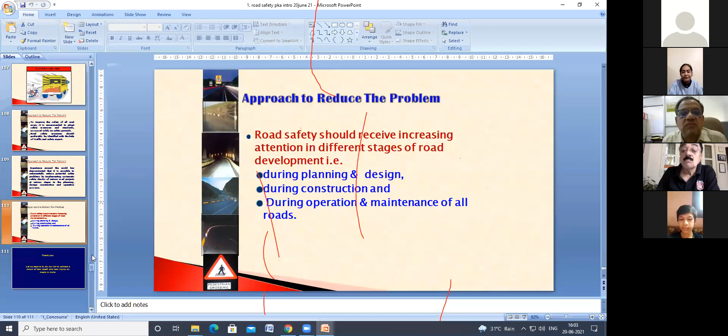So, am I audible? Yes, sir, you are clearly audible. Okay, and then the presentation is also visible? Yes, sir. Okay, so I am happy to note about the IRSC activities, and I am thankful for providing me this opportunity to interact with you.

So because time is limited, let us start. Today's topic is Safer Roads Through Design and Operations. The main agenda is to present something so that we can initiate a discussion regarding how we can ensure safety through design and operations on the Indian road network.

So mainly we would like to discuss what is the problem, what is the road safety scenario, and from the solution aspect, I would like to present some slides regarding how we can ensure safety through design and operations.

As we know, the problem before us is safety degradation on our road network. Here we can observe this large number of accidents all over the world.

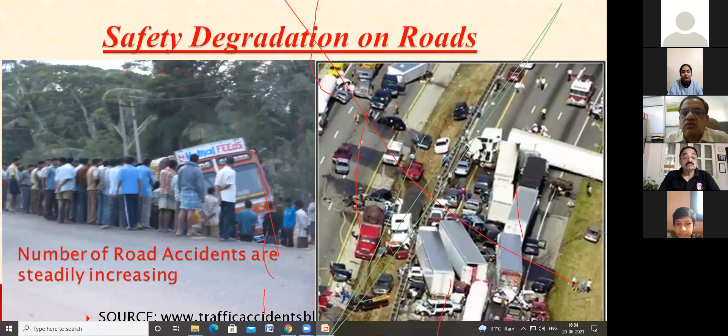Here we need to reduce road accidents because they are responsible for huge economic loss to any country or any society, and also a huge social loss to our country. So basically this is a huge socio-economic problem worldwide.

We all know about this, we are all concerned. So we will not go into details of the data or statistics, but mainly I would like to highlight that fatality rates are low in some countries, like about 2.8 or 3.1 or 4.

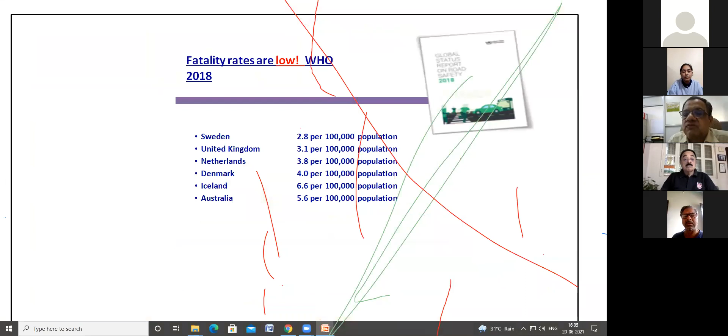But in our country, India, the death rate is very high - 22.6 deaths per 1 lakh population. So in India, we are having much higher fatality rates, especially compared to low and middle income countries, where the situation is also very worse.

The issue I want to discuss is that in spite of having cheap labor in these low and middle income countries, we are not able to address road safety issues. Even simple issues like why vegetation is allowed to grow over signs and block sight lines - this obstructs the line of sight and is a safety hazard. Similarly, why are white lines not maintained, potholes not filled? These are smaller things, but we are not able to maintain them to ensure safety on our road network.

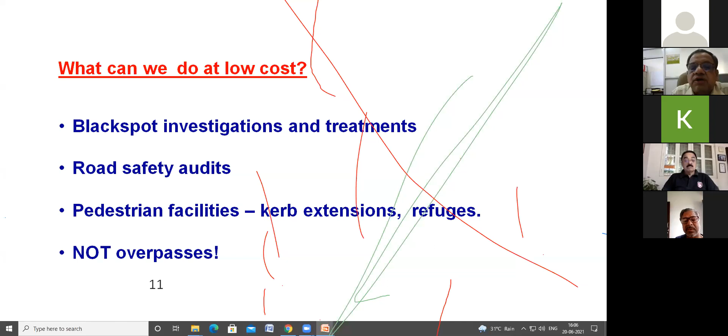Even with small low cost, we can do a number of things - we can investigate black spots, conduct road safety audits, and develop pedestrian facilities. This doesn't require huge investment, but these are very important and critical to ensure safety on our road network.

The basic idea is that road safety engineering is not simply putting a speed breaker wherever we want, and not only putting up good signboards. The basic requirement is that we should think rationally, logically, scientifically, and implement or recommend appropriate safety measures depending upon the requirement.

That is the basic objective of this presentation - that we should move away from traditional thinking and think about safety treatments that will actually work. We have to look for patterns in the crashes, and depending upon analyzing the situation and the road safety hazardous conditions, we should recommend appropriate options that will work. We should be more logical and rational in recommending appropriate measures. So by appropriate planning and designing, and also during operation, we can suggest remedial measures to ensure safety on our Indian road network. That is the basic idea of today's discussion.

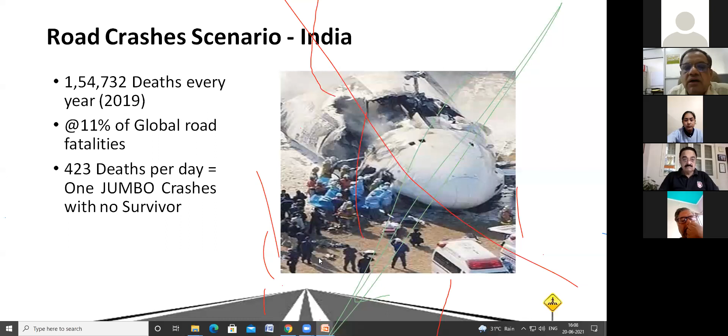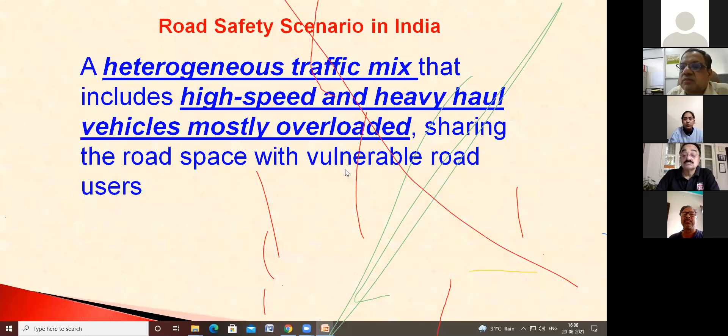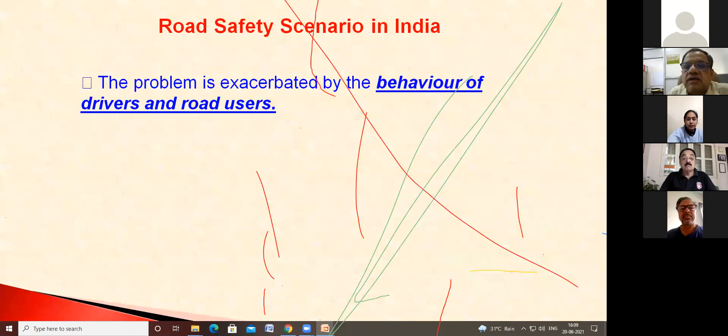The problem is further aggravated - excuse me. Sorry to interrupt, but can you please turn off your notifications? Okay, we should admit them. Excuse me sir, not notification, annotation sir, which is the lines coming on the screen. How? There's an option to turn off the annotations where you're sharing the screen. Okay, so we should turn off this. Clear? If you can erase it, it's coming all over the screen. Yeah, it's fine. Okay.

So driver and road user behavior is another important factor affecting road safety. You all know that we talk while driving, and a number of other issues are there.

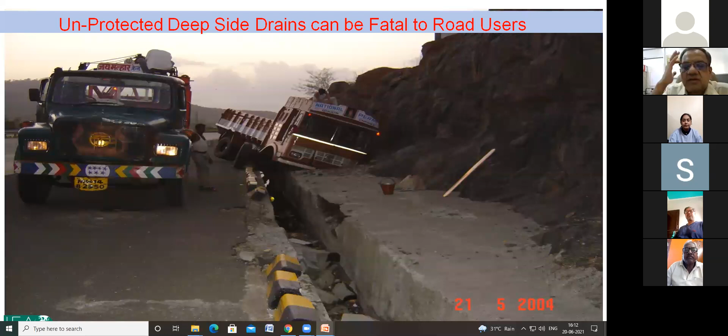Another important aspect is we have very poor road infrastructure in the country, poor and hazardous road infrastructure. I would like to share some photographs which highlight the poor road infrastructure in the country. Sometimes drains are left opened, which may lead to hazardous conditions. This type of situation becomes a potential accident spot, observed here and there on Indian roads in urban areas as well as rural areas.

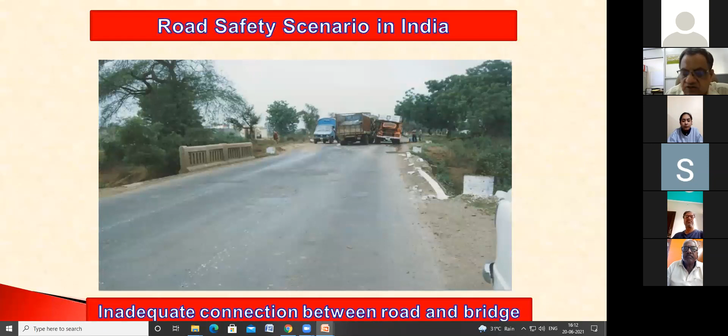As we know, this poor horizontal and vertical alignment. Here we have a blind vertical curve, so inadequate line of sight, which may lead to an accident. This is also an unsafe situation. Similarly, poor horizontal alignment, here the line of sight is obstructed due to overgrown vegetation. Small things, but they are important. Here vision is blocked due to trees. So if we remove this, we can enhance the safety.

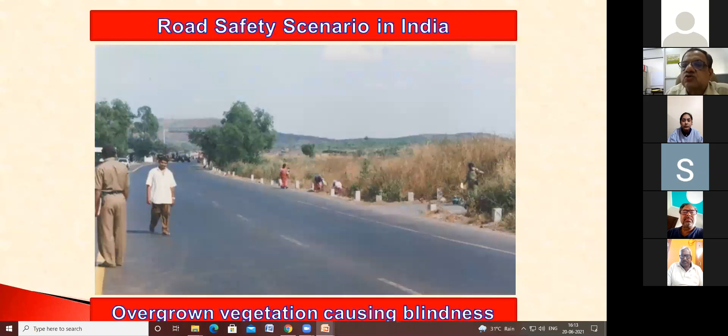So just to conclude or summarize, major reasons for higher fatality rates in our country may be due to mixed traffic, a mix of fast moving and slow moving vehicles, and then lack of planning and designing for all categories of road users.

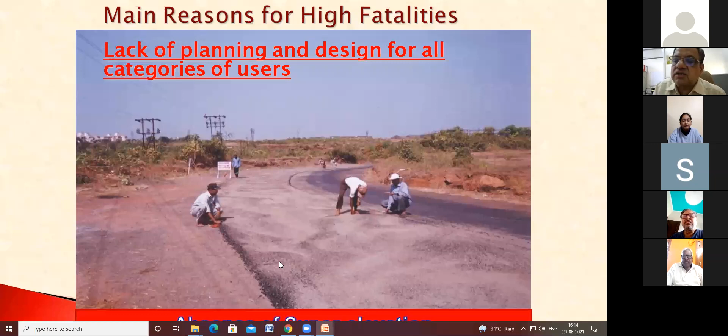Like in this photograph, on a sharp curve, we have to provide super elevation. Here the outer edge is supposed to rise with respect to the inner edge, so that we can counteract the centrifugal force to avoid overturning of the vehicles. But here in this particular section, there is an absence of super elevation, which is a safety hazardous condition. So lack of planning and designing.

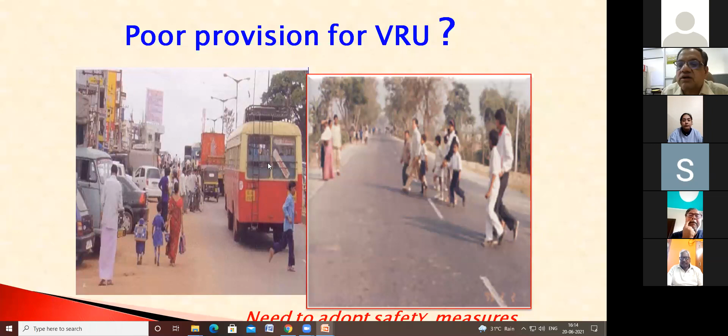Further, we have inadequate and improper safety provisions for vulnerable road users. So we have inadequate pedestrian facilities like absence of road marking or foot over bridges, etc. So there is more interaction of the pedestrian with the vehicular traffic, and this is an unsafe situation.

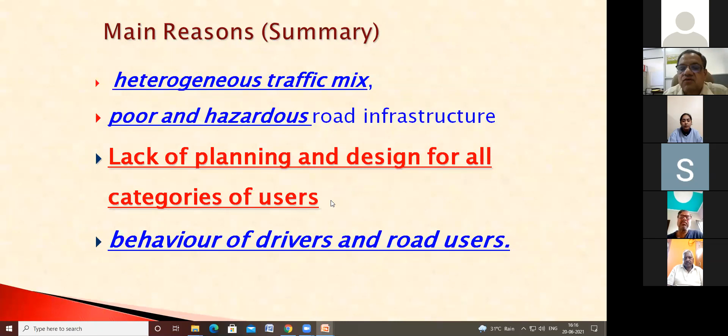So just to summarize some important reasons for this poor traffic safety scenario in our country: heterogeneous traffic mix, poor and hazardous road infrastructure, lack of planning and designing for all categories of users, behavior of drivers and road users, inadequate provisions for vulnerable road users, and also disregard or compromise on standards by way of cost cutting and safety in work zones.

So just to summarize, we can say basically we have a very unsafe situation due to improper planning, designing and operation of road infrastructure. That is also another important aspect for higher fatality rates in our country.

So now coming to the solution, what is our role as an engineer, how we can ensure safety. As all of you are aware, road safety is basically a multidisciplinary activity. So we need coordination or integration of various agencies involved, like safety NGOs, engineering agencies involved in development of highways or roads, police, enforcement people, RTOs, and other organizations. They have to coordinate and integrate to ensure road safety.

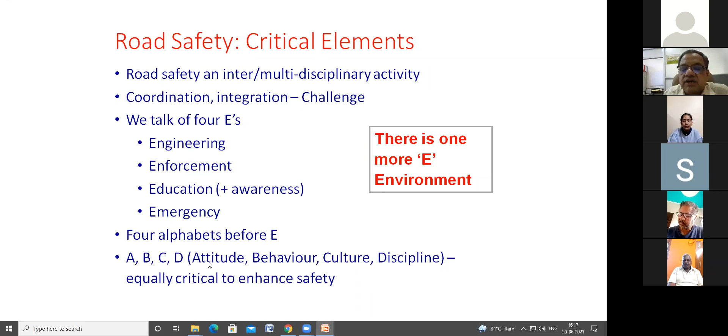Here we normally talk about 4 E's: engineering, enforcement, education, and emergency, to ensure safety. As this slide highlights, there are also 4 alphabets before E, that is A, B, C, D, that indicates attitude, behavior, culture, and discipline. So all are equally critical to enhance safety.

Mainly we will focus on the engineering aspect, how engineering measures can ensure safety on our road network. So basically, approach to reduce this problem: experience around the world has demonstrated that it is possible to substantially reduce potential safety problems by implementing systematic safety checks of various road projects at various stages in the planning, design, construction, and operation process. So all over the world, it is indicated that by appropriate remedial safety measures at all stages of any road project, starting from planning, designing, construction, and operation, we can ensure safety.

So road safety should receive increasing attention during planning, design, construction, and operation. Just to highlight the important role of engineers in improving road safety, I would like to share a small story: a road crash is basically the result of a chain of events, and we have to break that chain of events to ensure safety.

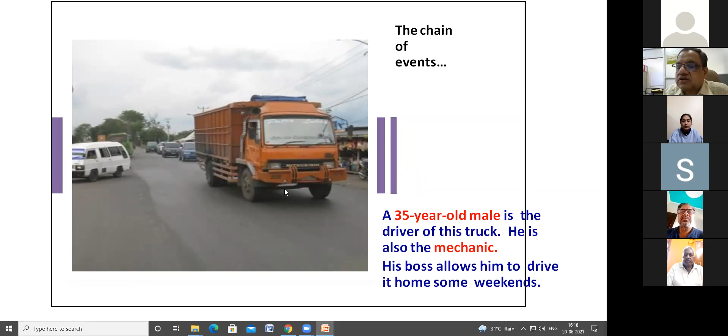In this chain of events, a typical 35-year-old male is the driver of this truck, who is also the mechanic. One weekend he spent the whole weekend repairing this truck, and the brakes were very worn. He finishes late Sunday, and then his friends drop around just as he finishes the repairs. Both relax, drink, and talk until very late, so he did not get much sleep.

Basically, I would like to highlight that accidents generally take place due to this chain of events, and we have to break this chain to avoid accidents. On Monday morning, they started early loading sand at the river near the city. They had little sleep, no breakfast, and were late for work. The driver drives the truck along the national highway, where traffic was heavy and the highway had unsealed shoulders.

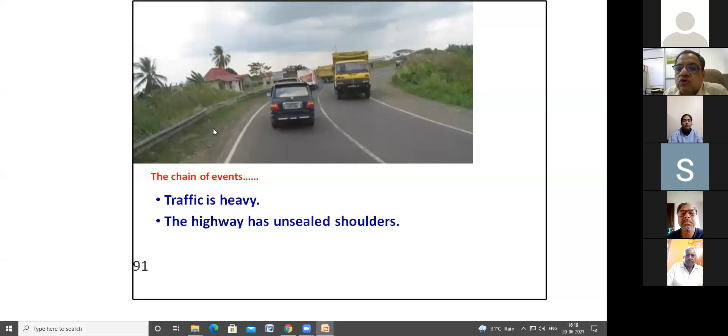That is, the shoulders were not paved, unpaved shoulder. Also, the road is very slick, it has little skid resistance. Light rain is falling, there were no sealed shoulders, and many big drop-offs from the pavement, a big drop-off from the carriageway to the shoulder.

So he traveled fast. There were many motorcyclists, some pedestrians and bicyclists also on that particular road. He drives very close to the truck ahead of him, impatient to overtake. The truck ahead has dirty, broken brake lights, and further there was a bus in front of that truck. This is a very common situation on our roads.

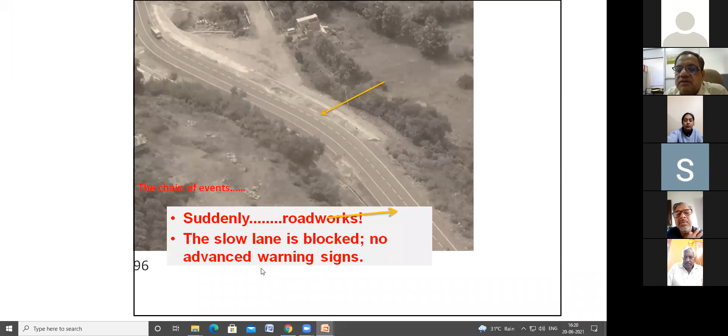The driver was aware of that particular road, so he knows there is an overtaking lane ahead. He accelerated to overtake the slow bus and truck. Suddenly, some road works were going on in that overtaking lane. The slow lane was blocked, and no advance warning sign was there.

So the bus and other trucks swerve to the right without warning. Our driver has no time to react, and to avoid a side-swipe collision, he swings his truck to the right, hoping to miss the other truck. At that instant, another motorcycle with 3 girls on it is traveling past from the other direction, not wearing even helmets. Our truck driver brakes late and hard, but the new brakes grab, and the truck strikes the motorcyclists.

One bus passenger also died in this accident, and 2 motorcyclists were killed, and police and legal action follows. The main idea of sharing this story is to show what happened in this chain of events, what caused the crash. If we analyze the possible causes from the user's point of view: maybe the driver was frustrated, he was drinking, lacked sleep, was driving at excessive speed, was impatient and inattentive, and the girls on the motorcycle were not wearing helmets. So the point is that the accident took place due to a chain of events, and all are responsible. Similarly, vehicle factors: new brakes of his truck, dirty broken brake lights of another truck, and raining was there.

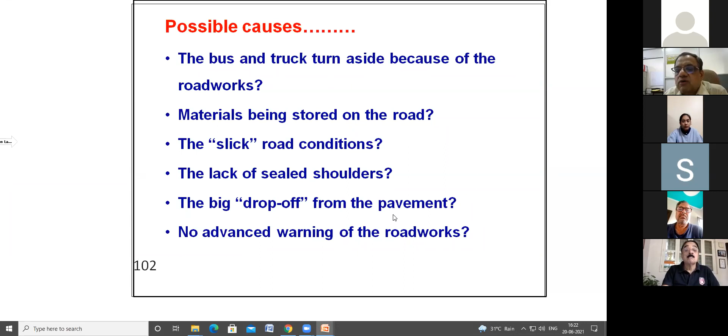Buses and trucks had to turn aside because of the road work. Materials were also stored on the road, and the road condition was poor. We had lack of paved shoulders, a big drop-off from the pavement, and no advance warning of the road works. All this led to an accident.

The basic point here is that as an engineer, we could have broken this chain of events by not storing material on the road, by taking appropriate safety measures during construction. We must have much better advance warning of the roadworks, and we can have paved shoulders, which may create an escape route, eliminating the big drop-offs on the pavement.

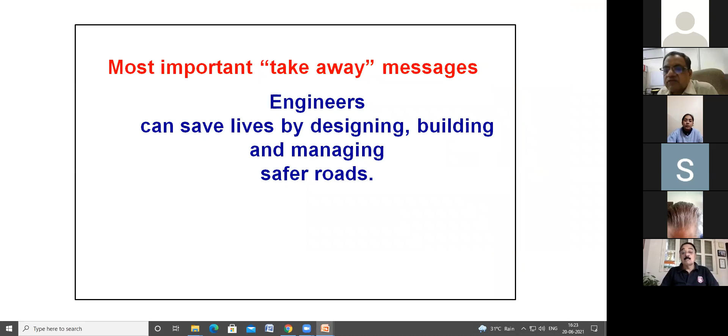In this way, engineers can play an important role by adopting or implementing appropriate safety measures, and thereby enhance or improve the safety of roads. As engineers, we can save lives. So the most important message here is that as engineers, we can save lives by properly designing, building and managing safer roads. That is the basic objective of today's discussion.

Because time is limited, let us discuss some design issues and how we can ensure safety by implementing appropriate measures during design. Experience has shown that new or upgraded roads are not always as safe as they should be. This is often because potential safety problems were overlooked when the roads were designed, and this leads to unsafe roads.

Another important point is that it is much easier to change the design than to change the road once it is built. So it is better, or proper, that while designing a road, we take care of all the important safety features so that we can ensure a safer road network.

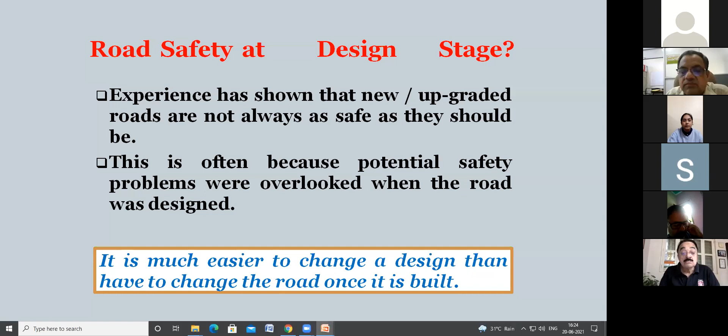Sometimes improper design causes accidents, and non-professional design leads to human losses, which may result in an accident. By proper treatment of all geometrical features of the road, we can ensure a safer road network.

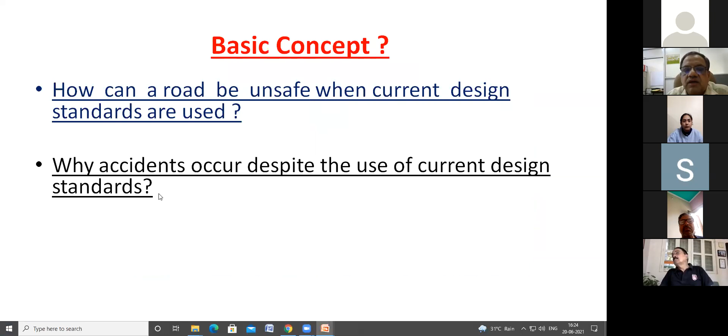Another important issue is, how can a road be unsafe when current design standards are used? The issue may be why accidents occurred despite the use of current design standards. The point here is that even if we have designed the road following all current design standards, it may still be unsafe.

The issue here is that basic engineering standards may be adequate, but the road is likely to function under different operating and environmental conditions, depending upon driver behavior or other road user behavior, and vehicle roadworthiness. So even if we have followed current design standards, we have to check and ensure compliance with all safety issues while designing and planning a road network.

So we should adopt appropriate design standards to ensure safety on our road network. As we are aware, the road is basically a shared space, so special attention should be given to vulnerable road users like motorbikes, bicycles, and pedestrians. Considering their requirements, we should design our road network.

Similarly, we should consider the needs of all types of road users. Even pedestrians, and sometimes animals, are sharing the same road space. Considering all their requirements, we should appropriately plan and design a safer road network.

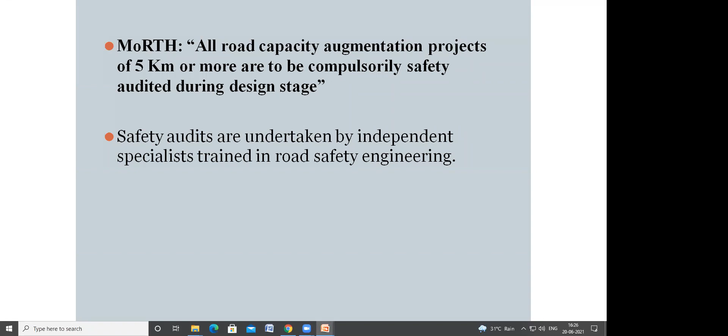Considering this aspect, the Ministry of Road Transport and Highways also suggested that all road capacity augmentation projects of 5 kilometers or more are to be compulsorily safety audited during the design stage. This safety audit should be undertaken by independent specialists trained in road safety engineering. Ideally, with the help of an independent road safety expert, we should conduct an audit at the design stage to identify safety deficiencies, and accordingly suggest remedial measures to improve the design of a road network.

So the basic objective of this presentation is to highlight some design issues affecting road safety which might otherwise be overlooked or considered insignificant.

As we have discussed, there are 4 basic elements involved in a road accident that affect road safety: road user characteristics, vehicular characteristics, road characteristics, and environmental characteristics. Road users may include pedestrians, drivers and passengers, and their characteristics affect safety. Ideally, the interaction of all these affects safety on our road network.

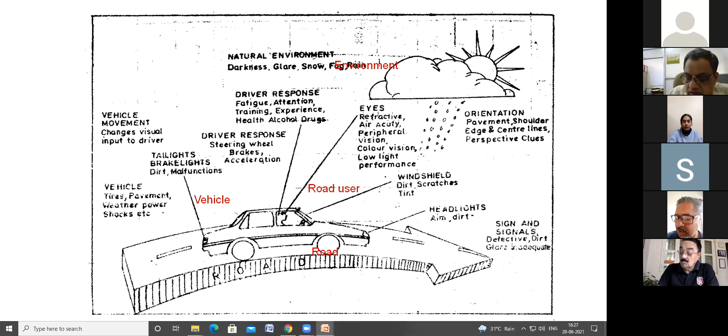Traffic accidents result from actual failure of road users, vehicles, road and condition, and environmental condition to discharge properly their respective functions in the traffic movement.

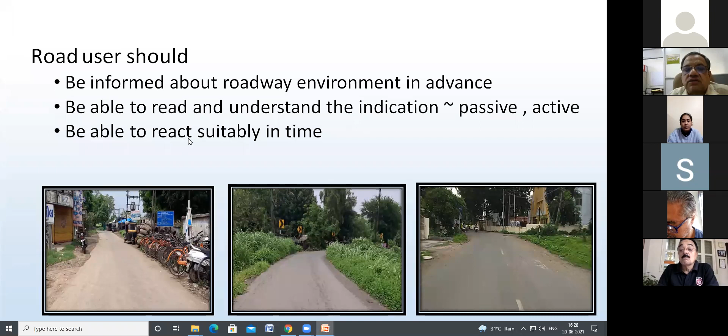Ideally, we should design our road network considering all these factors. As we have discussed, road user behavior is typical and we have low awareness levels, so considering their various visual characteristics, we should design the road network to ensure safety. The requirement is that road users should be informed about the roadway environment in advance, be able to read and understand the indication, and be able to react suitably in time.

Similarly, vehicular characteristics are important - their weight, length, speed characteristics, etc. They affect traffic operation and ultimately road accidents or road safety. Vehicle technology is also advancing, so there is a need to account for these technologies in the design of the roadway system to provide the highest level of services and safety. Our vehicles should be visible.

Nowadays we have retro-reflective tape, etc., so we can enhance the nighttime visibility of vehicles, and also use of seat belts, padded dashboards, etc. enhance the safety of vehicles.

Road characteristics are also important and affect safety, like we should have a minimum stopping distance visible to the driver at any instant of time. We should design all the geometric features, safe speed, as well as surface characteristics that affect road safety.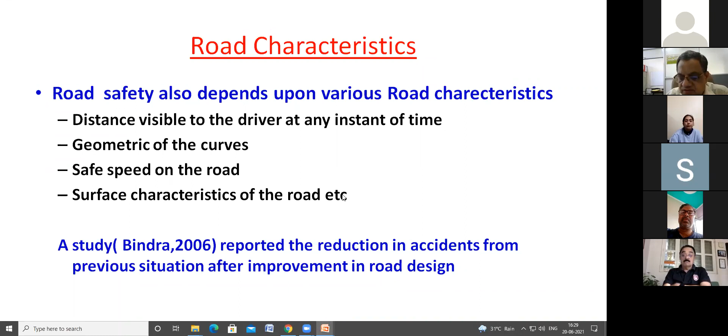A study was conducted which indicated how improvement in various geometrical features of a road is responsible for, or how effective it is in, improving the road safety scenario.

This slide also highlights the role of engineering - by proper scientific design of any road element, particularly a road junction, we can enhance safety on our road network.

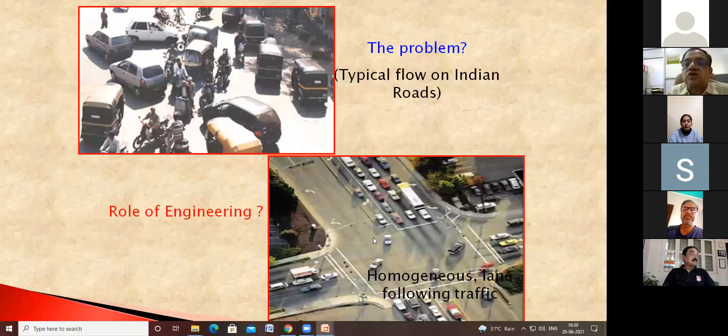On the upper photograph we have very haphazard traffic moving in different directions, but by proper scientific designing and marking, we can have lane-following traffic, and in this way we can ensure safety. So by proper scientific designing of various road elements, we can ensure safety.

Not only the number of accidents, but also the severity of injuries can be reduced by appropriate scientific designing. For example, energy absorbing barriers flex and deform under collision in such a way that the impact of collision can be contained and decelerated in a manner more compatible with occupant survival.

For example, if we have any fixed object on the road, a vehicle hitting it may lead to a fatal accident. But by providing an energy absorbing barrier, we can reduce the severity of accidents. So by appropriate scientific designing, we can not only reduce the number of accidents, but also their severity.

This same slide highlights these same things - appropriate engineering measures can be effectively utilized to reduce accidents or improve road safety.

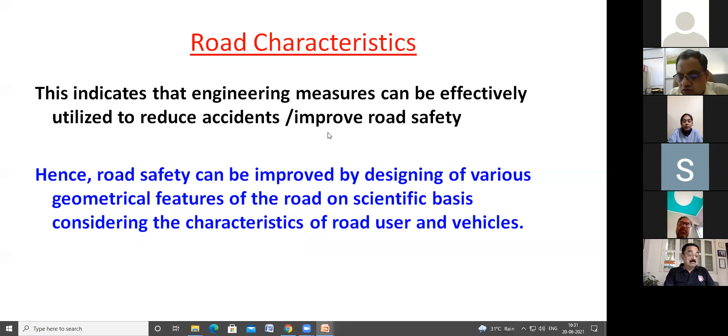Similarly, a safe road environment should warn for unusual features, inform of the conditions to be encountered, guide through unusual sections, and properly plan and design to control through conflict points. We should forgive errant behaviors, so there should be no surprise. We should have controlled release of relevant information and repeated pertinent information.

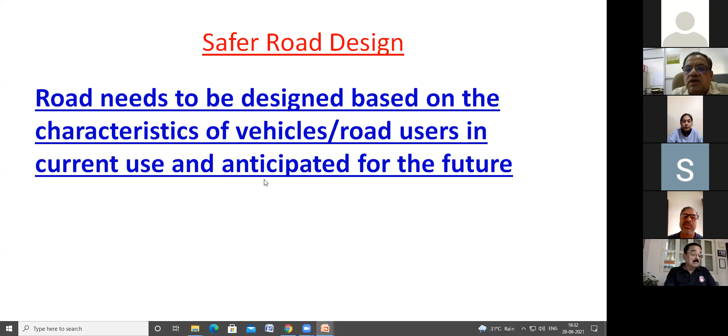Roads need to be designed based on the characteristics of vehicles and road users in current use and anticipated for the future.

Only enforcement and education measures will not help; engineering measures are also important, because generally people don't do what they are told to do. We have to plan and design roads in such a way that even if a driver makes a mistake, we should not punish them. So the ideal requirement is that we should design forgiving highways.

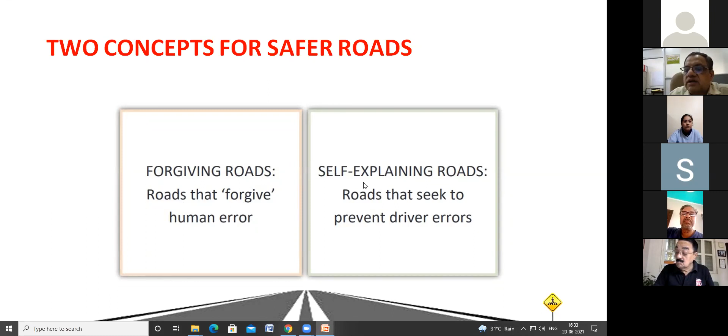The forgiving roads that forgive human errors. So engineering measures are equally important, other than enforcement and education measures. As an engineer, our responsibility is that we should plan and design forgiving roads, roads that forgive human error, and also self-explaining roads that seek to prevent driver errors.

It is a responsibility shared between road users and system providers: drivers should follow the rules, designers should provide safe roads, and enforcing agencies should enforce. Only then can we ensure safety on our road network.

A forgiving road is one that does all that is possible to keep the vehicle on the road. We should have drivable side slopes, no uncovered drains nearby. Ideally we should design forgiving roads, so that even if a driver makes a mistake, we should not punish them in terms of a fatal accident.

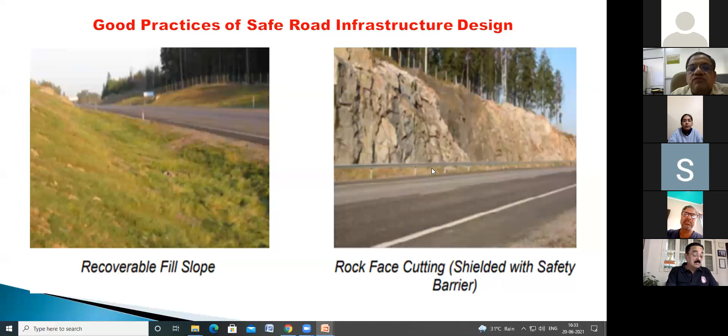We can have recoverable fill slopes and provide barriers, so that even if the driver is off-tracking the road, it may not lead to a fatal accident. Because time is limited, we can quickly skip through these slides. The basic requirement is that we should warn, inform, guide, and provide a forgiving road system.

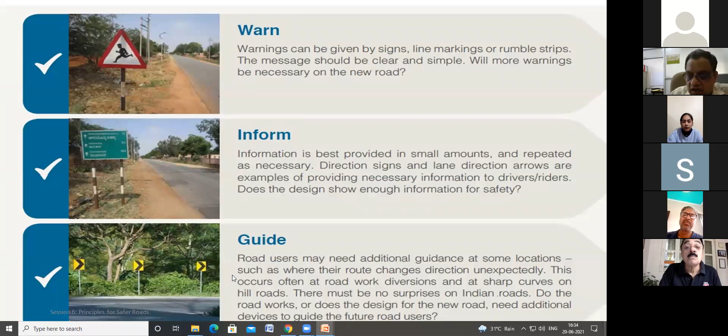There are three basic principles of safe operating practices on highways: we should fulfill the driver expectancy, provide positive guidance for road users, and maintain geometrical design consistency.

The driver can be given sufficient information through proper planning and design of signboards, etc., where he or she needs it, and in a form he or she can best use to safely avoid a hazard. So we should provide proper information.

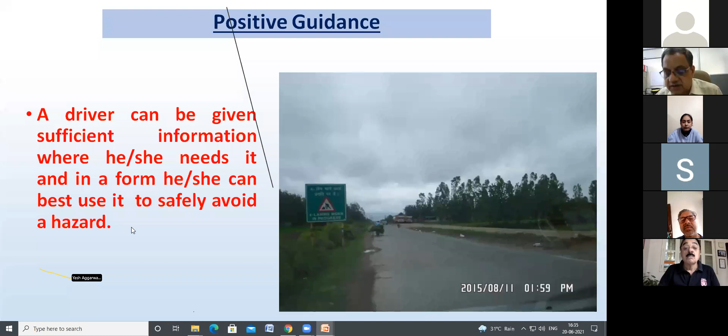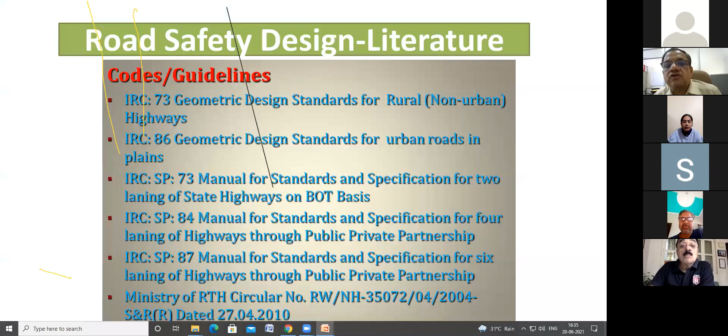Our geometrical design should be consistent. Consistency here relates to the sameness of the nature of the road from one section to another, so that the driver can adapt to it. A large number of literature and IRC publications are available dealing with how to scientifically design our road networks; for details we can refer to this literature.

But quickly, now we will discuss some examples of how we can ensure safety through design.

This slide highlights some road planning, design and safety deficiencies, common observations on our road network, like parked vehicles encroaching into the traffic lane. We should have adequate shoulder widths, so that in case of emergency a vehicle can be parked there, because this situation is dangerous.

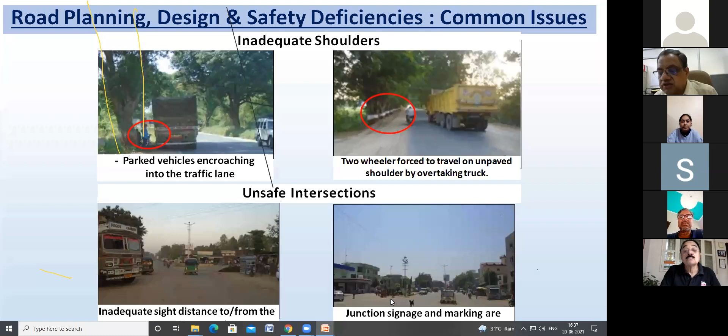Similarly, two-wheelers are forced to travel on unpaved shoulders due to overtaking trucks, and there are inadequate sight distances. This is an unsafe intersection. These are common observations on our road network, and through proper planning and design we can avoid all such situations.

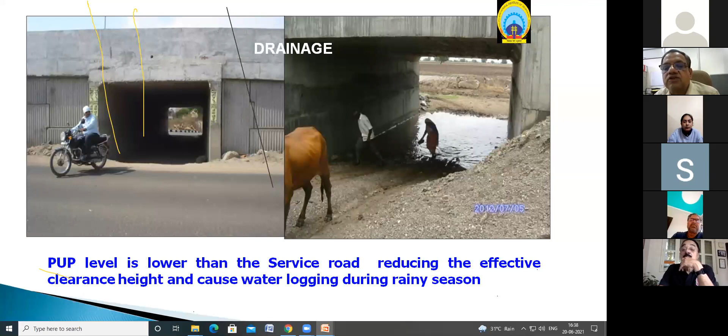Similarly, the pedestrian underpass is lower than the service road, reducing the clearance height and causing waterlogging during the rainy season. This is also a case of improper design. This underpass has poor drainage and insufficient height. So small things, but improper design leads to unsafe situations on our road network.

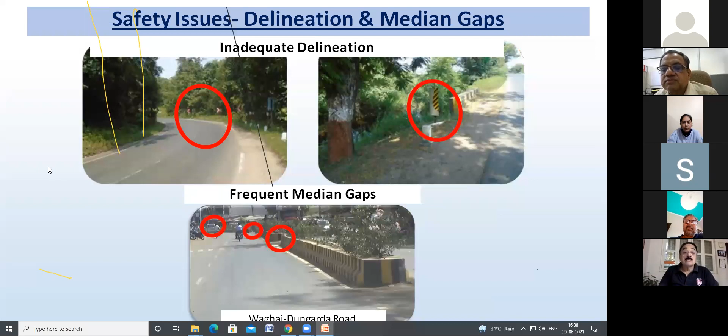Similarly, inadequate delineations on sharp curves, frequent median gaps in these photographs below. These are also unsafe locations, and these need to be properly planned and designed on our road network.

Are there stretches where compromise on design standard has been made? We have to question how, why, when, where, what, and if the answer is yes to any of these questions, then we should find out the appropriate solution of these problems. So we should provide enhanced safety in planning stage as well as design stage. I would like to highlight one or two points regarding how we can plan a safer road network. In this slide, we have two drawings.

In the first drawing, this is a split development, and in the second drawing, this is one-sided development. In this first photograph or drawing, residential area is separated from school and working place by a major road. Workers and students have to cross the road. In this planning, a road is passing through the middle, with schools on one side and workplace and residents on the other side. So workers and students have to cross this road to attend their schools or workplace. This is an unsafe situation.

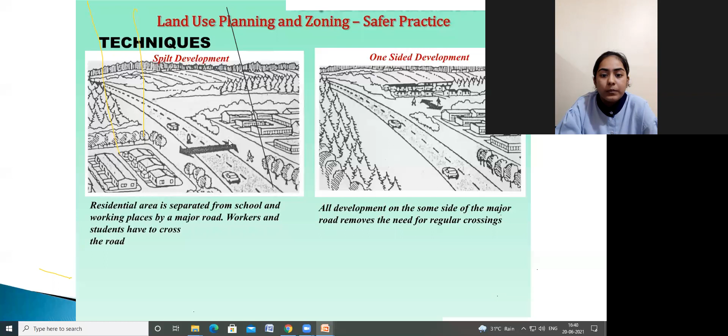Here, the better way we can plan a safer road network is that we should plan all development on the same side of the major road, which removes the need for regular crossing, and in this way we can enhance safety. So just small things, like we can plan a bypass, and in this way bypass removes through traffic from the villages, enhancing safety.

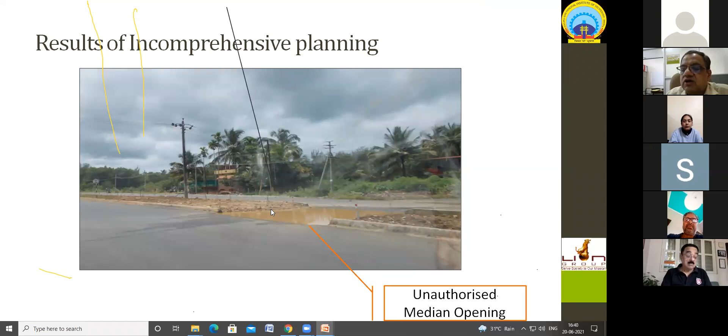Sometimes due to incomprehensive planning, that may result in unauthorized median openings, which is an unsafe situation. So ideally we should design the road geometrical features to minimize fatality, minimize injuries, and minimize damage to vehicles. Basically we have to design all the geometrical features of a road, which deal with the dimensions and layout of the visible physical features of a road. This consists of horizontal curves, vertical curves, camber, super elevation, sight distances, and extra widening.

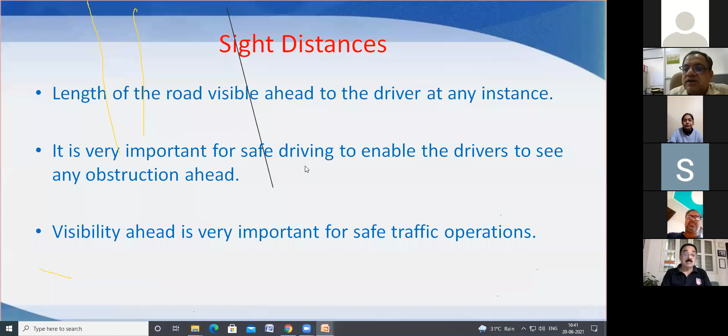Another important element is sight distance, which is the length of road visible ahead to the driver at any instant of time, and it is very important to ensure safe driving. So visibility is very important. Ideally, we should design the line of sight and sight distances appropriately to ensure safety on our road. Sometimes the line of sight is obstructed due to growth of trees, etc., so we should ensure the visibility.

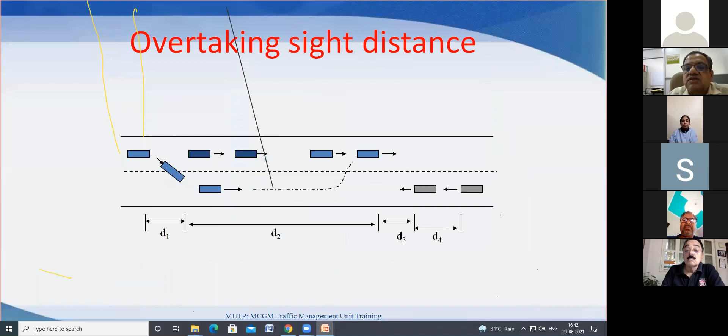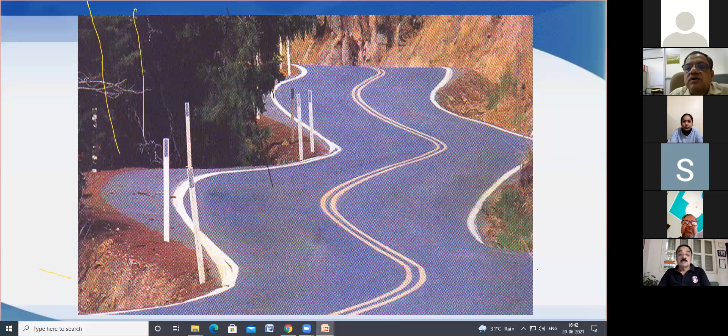So ideally, we should design all the horizontal elements. Because time is limited, I would like to quickly highlight one or two points. We should avoid broken back curves, and we should avoid isolated sharp curves. The isolated sharp curve in a good alignment is more dangerous than a series of curves in a generally poor alignment, as it affects the attention of the drivers. So there are a number of issues.

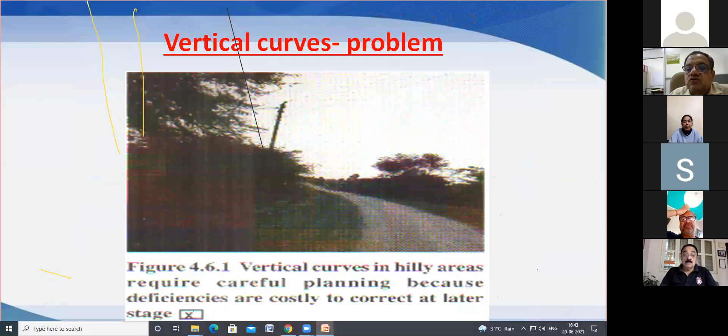We should provide proper transition curves, super elevation, and extra widening also. Similarly, for vertical alignment, we should properly plan and design it to ensure adequate line of sight and smooth grading, etc. Some safety issues arise at vertical curves, like a series of ups and downs in the profile which should be avoided and corrected; we can provide a uniform gradient, which will be more safe.

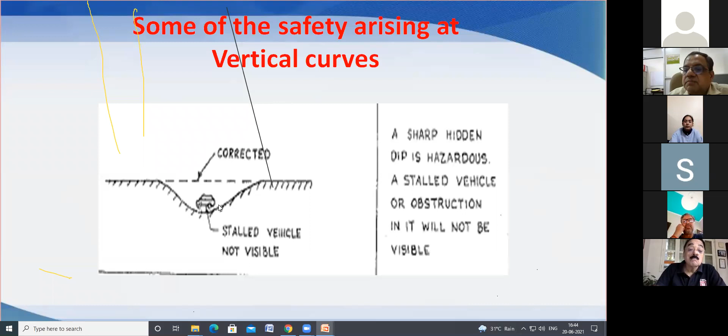There are a number of other issues. In this drawing, a sharp hidden dip is hazardous, as a stalled vehicle or obstruction will not be visible. Such dips should be avoided because they are a safety hazard. We can have a smooth vertical alignment also to ensure safety on our road network.

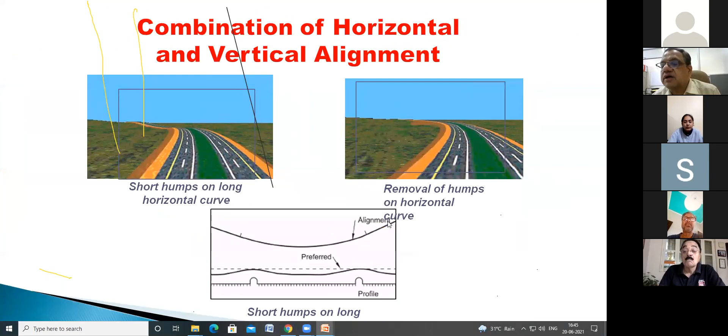To summarize, we should be liberal in adopting radii of horizontal curves. Junctions should be clear of obstructions, tree plantation should be kept away, cattle underpasses and crash barriers should be provided, and a depressed median is safer than a raised median. These are some issues to consider while designing a safer road network.

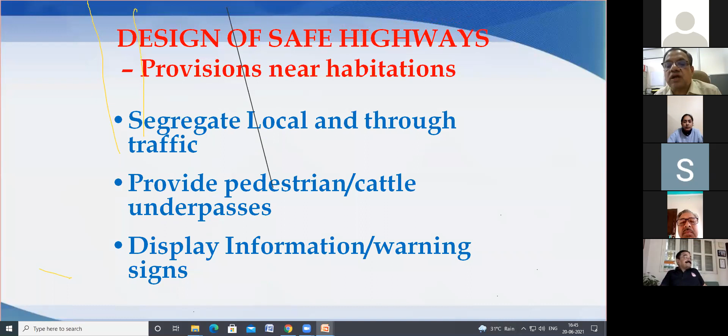We should segregate local and through traffic. There are a number of elements that need to be considered while designing a safer road network, such as alignment selection and land use. Here the road passes through the town area, so that can be bypassed. For cross-section elements, instead of a raised median, we can have a depressed median.

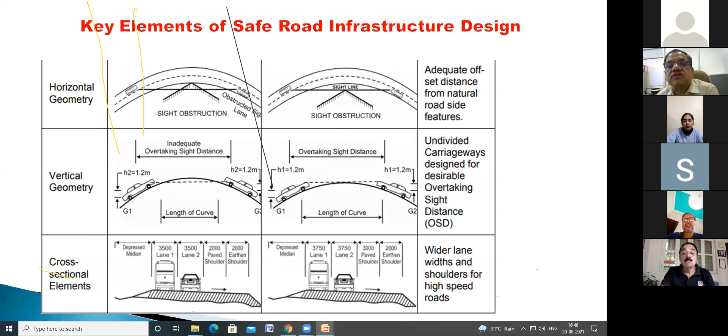There are a number of other things, such as horizontal alignment and vertical alignment, which we have already discussed, so we can skip those given limited time. Similarly, in the design of junctions, by proper channelization and constructing proper acceleration and deceleration lanes, we can enhance safety. So by adequate design of junctions also, we can enhance safety.

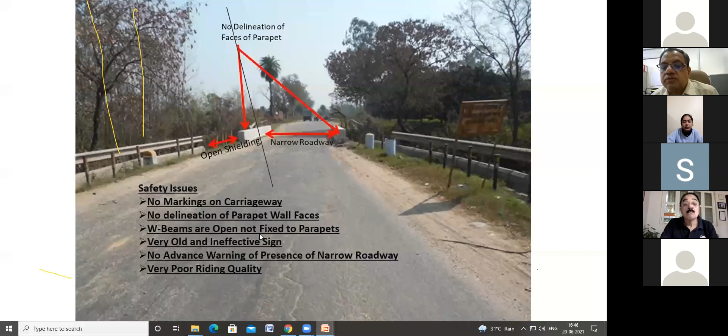Similarly, design of signs, markings, etc. As a case study, here is some national highway in Uttar Pradesh showing this condition. There are a number of safety related issues here, like no marking on the carriageway, no delineation of parapet wall faces, W-beams that are open and not fixed to parapets, and very old, ineffective signboards.

So by proper designing of various markings etc., we can enhance the safety on this particular road. Similarly, nighttime visibility is also important, including hazard marking.

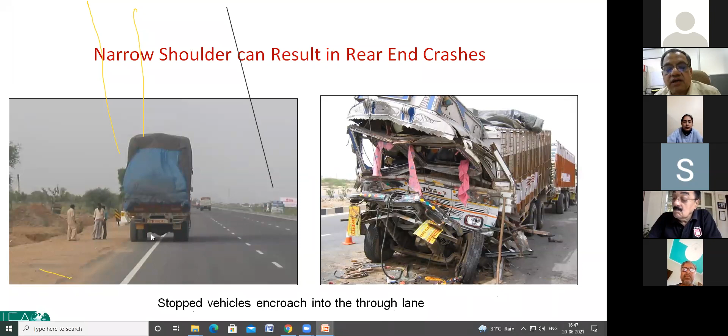Shoulders also need to be properly designed. Sometimes a narrow shoulder can result in rear end crashes, as a stopped vehicle encroaches into the through lane, which may lead to rear end crashes. So we should provide proper shoulder width, preferably paved, so that it can provide a safer system.

Lastly, something about the operational aspect. Road safety through operation is also very important. We should ensure compatibility between the safety features of a road and the functional classification of the road, to identify any feature that can, with time, create a safety problem.

For example, vegetation blocking a sign. We have to ensure safety during operation also, identifying all features in the road system that pose a safety hazard to any road users. So safety during operation is also important to ensure safe operation of the road network.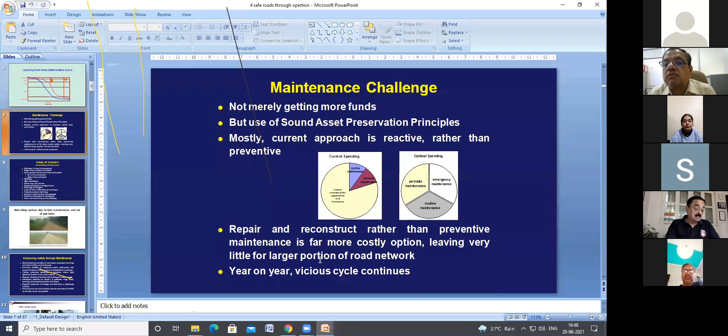So basically there are a number of things - we have to maintain the surface condition also. Sometimes areas of concern from maintenance point of view include potholes, cracks in the pavement, edge break, extra growth of tree branches, skidding, expansion joint on bridge decks, bearing on bridges, broken crash barrier. These are some maintenance related issues that we should take care of to ensure safety during operation and maintenance of any road project.

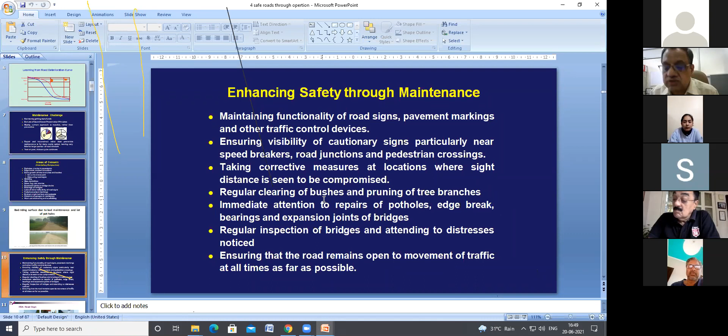Sometimes bad riding surface due to bad maintenance may lead to potholes, and this may create a safety hazard condition. Ideally we should maintain the functionality of all road signs and markings, ensure visibility of all signs, and take corrective measures at locations where sight distance is compromised. These are issues we should take care of during operation of any road project.

During this operation period, we should monitor whether the prevailing speed corresponds to the design speed, whether visibility and sight distance criteria are still satisfied, and a number of other issues.

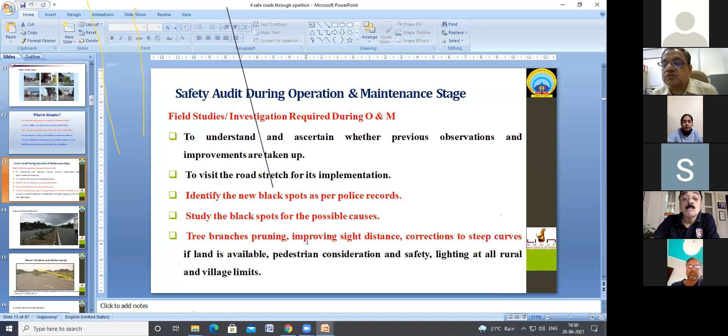We should identify new black spots as per police records, and study the black spots for possible causes during the operation period to ensure safety. Sometimes we need tree branch pruning, improving sight distances, and correction to steep curves.

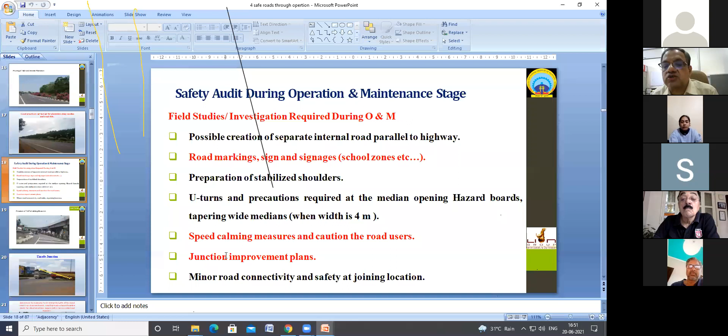We should have pruning of roadside and median plantation. These are small issues like road markings and provision of traffic calming measures. Unsafe junctions need improvement plans to avoid any collisions or conflicts. Similarly, there are a number of issues related to traffic signs and markings.

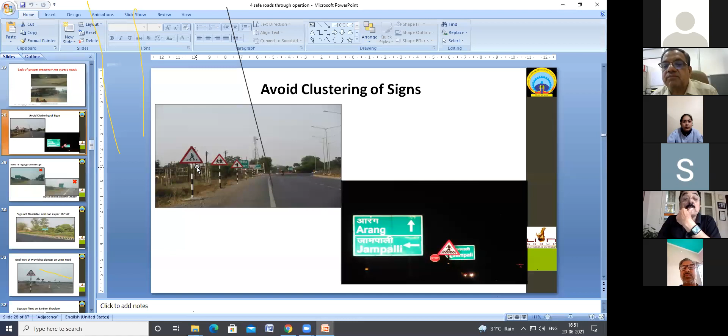Sometimes we have non-standard road markings on our carriageway, inadequate signs, or clustering of signs. There may be numerous signboards which may confuse the driver, or they are not effective, not of proper shape, not readable, and not as per IRC 67. During operation, we can check all these things to ensure safety on our road network.

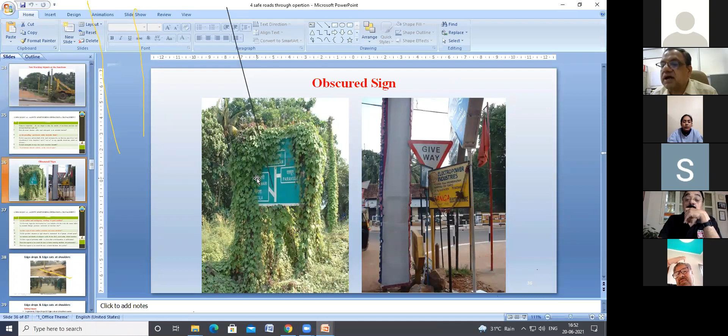Sometimes signage is fixed on earthen shoulders, which is also very dangerous. Sometimes signals are not working, so we should take care of all these things. Sometimes signs are not visible due to vegetation from trees and plants, so they are not effective or useful.

Sometimes there may be edge drops and edge cuts at the shoulder - this is also a very unsafe situation. We should take care of all these things to ensure safety during operation also.

Lack of a proper and strong shoulder is an issue - the shoulder is also very important in enhancing safety. The shoulder needs to be filled with selected materials and proper compaction wherever we find the shoulders are not adequate.

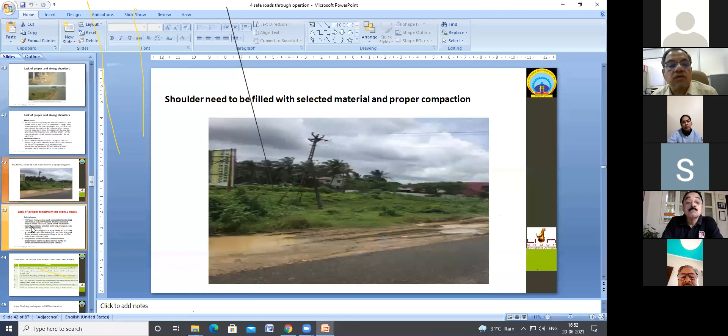Similarly, marking at toll plazas and marking at bus bays are some of the issues. Another important issue is regarding the crash barrier - we have to provide either metal beam crash barrier or concrete crash barrier, and some issues are related to these barriers.

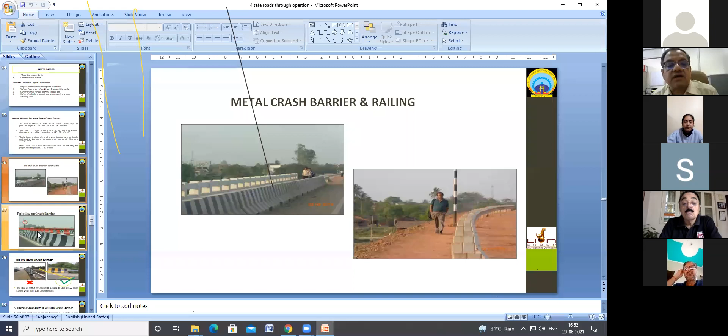The barrier should be painted, and the face of the metal beam crash barrier should not be mismatched and fixed to the face of the RCC crash barrier with a fish plate arrangement. This is an incorrect and unsafe practice - ideally it should match with the RCC barrier.

The metal beam crash barrier is a semi-rigid barrier and should not be provided on the top face of a concrete structure. These are small issues, but during operation we have to ensure the metal beam crash barrier is not provided over a concrete rigid barrier in this way, as this is also not a safe practice.

Here, the metal beam crash barrier is fixed behind the kerb, which is also not a safer practice. Ideally, the second photograph shows the safer practice.

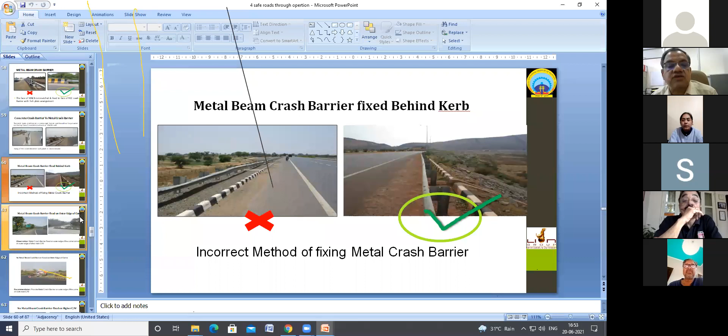These are smaller things, but we have to ensure safety during operation, and we should conduct a safety audit during operation also to identify all such deficiencies and improve the things. Similarly, here no metal beam crash barrier was fixed on the outer edge of the curve, and this may lead to an accident.

No metal beam crash barrier is fixed on the higher carriageway here. Both carriageways are at different levels, and in this situation no metal beam crash barrier was fixed on the higher carriageway. This is an unsafe practice and may lead to an accident.

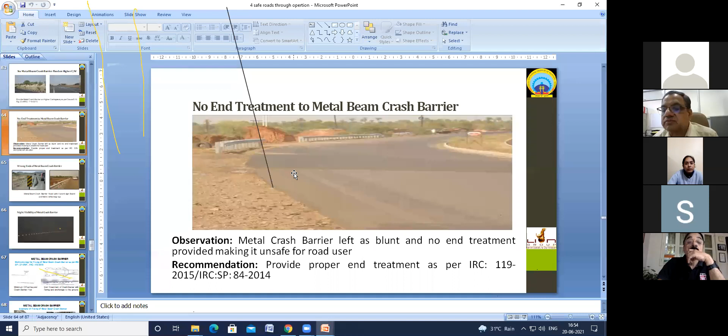End treatment to the metal beam crash barrier is also important. Here there is no end treatment, which is unsafe. We should also ensure the night visibility of the metal beam crash barrier.

There are a number of things to consider. Another important aspect is that during operation, we should ensure there is a highway ambulance available along with a list of hospitals, police stations, fire stations, and so on to ensure safe operations. Road safety awareness camps and inspections are also important.

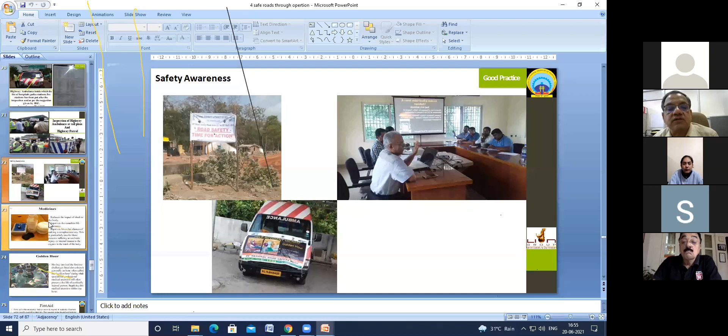Appropriate medicines and first aid facilities are needed, as we discussed regarding the golden hour. The first hour is very critical to save the life of victims, so we should have appropriate medical facilities to take care of victims, first aid, and all these things. Similarly, chevrons at curves highlights and improves visibility, enhancing safety.

Nighttime visibility is also important. We should ensure safety during nights also, and ensure adequate visibility of all signboards and curves, to ensure safer operations of our road network.

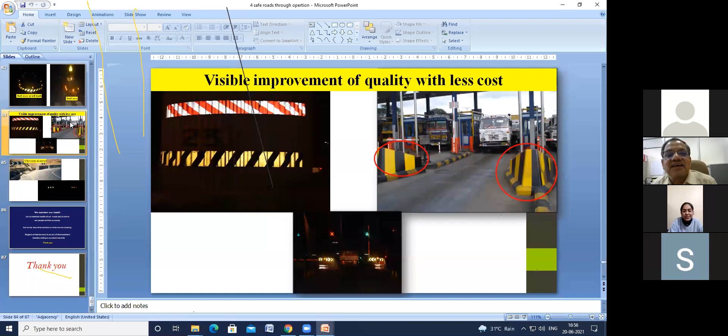Thank you so much, sir. This was really a thoughtful presentation. Because time was limited, I had to hurry to complete the presentation in time.